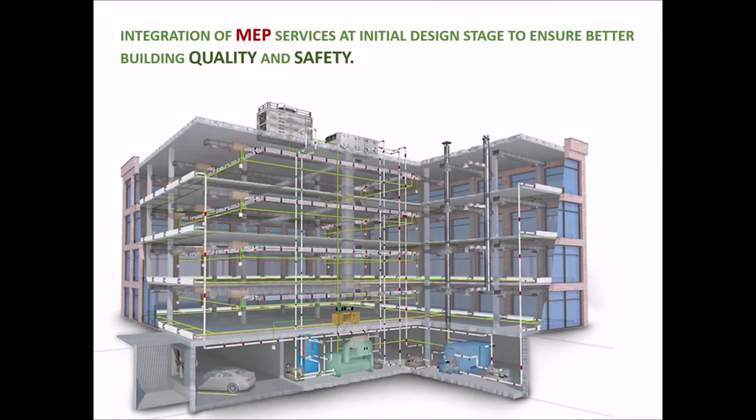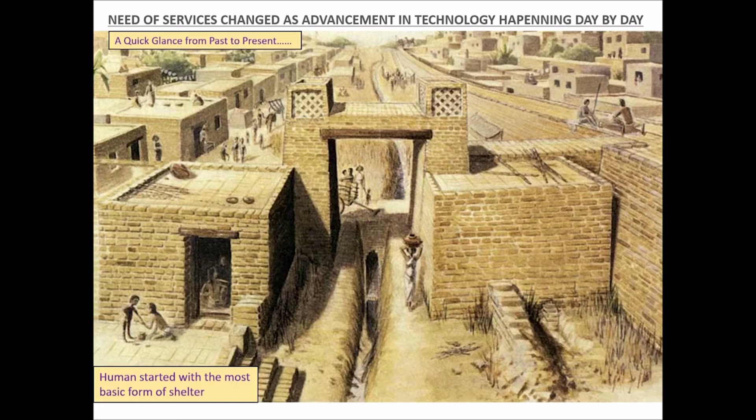Need of services changed as advancement in technology happening day by day. A quick glance from past to present. Humans started with the most basic form of shelter. The shelter evolved with increasing needs and progress in building materials. New materials thrived in the market. With the invention of breakthrough technologies in AEC - architecture, engineering and construction - buildings expanded vertically and skyscrapers came into existence.

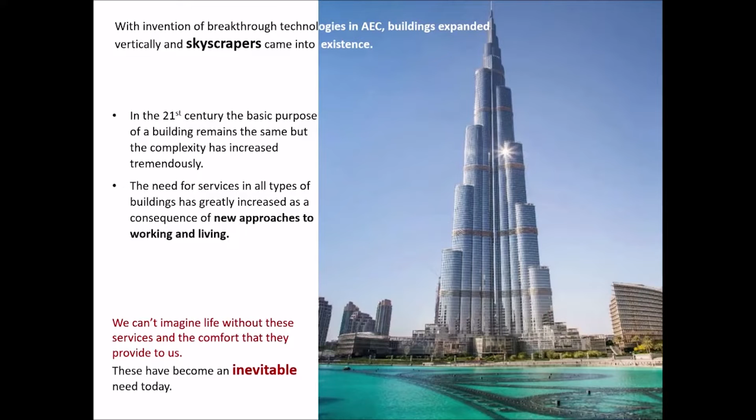In the 21st century, the basic purpose of a building remains the same, but the complexity has increased tremendously. The need for services in all types of buildings has greatly increased as a consequence of new approaches to working and living. We can't imagine life without these services and the comfort they provide us. They have become an inevitable need today. Now we have buildings with complex functions and services like malls, hotels, and hospitals. Our comfort, building operation economics, and building life cycle are now largely dependent on how effective these MEP services are planned in a building. Proper MEP services integration enhances quality and safety of a building, hence a comfortable and safe environment can be achieved. Imagine life without all these.

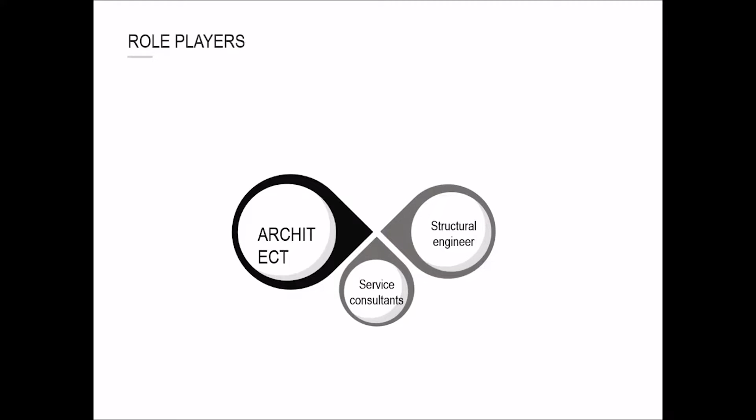Now there is need to talk about the key role players involved in the design decisions about the integration of services with the structure at initial design phases. The complexities of modern construction has given rise to the need for various professionals and specialists to come together and work as a team. They include architects, structural engineer, service consultants, and clients. The designer and architect is responsible for proper coordination among the whole team.

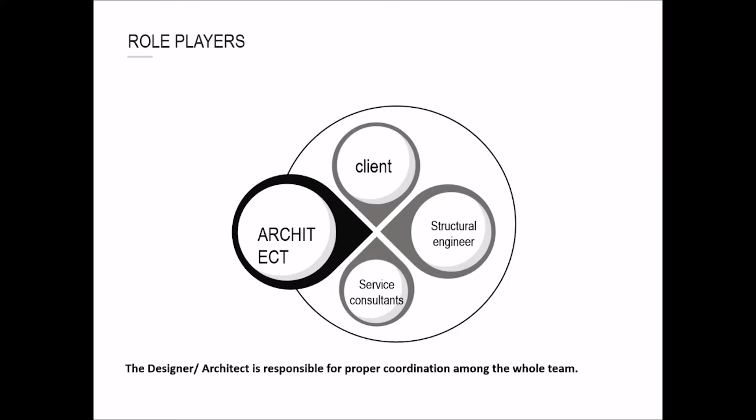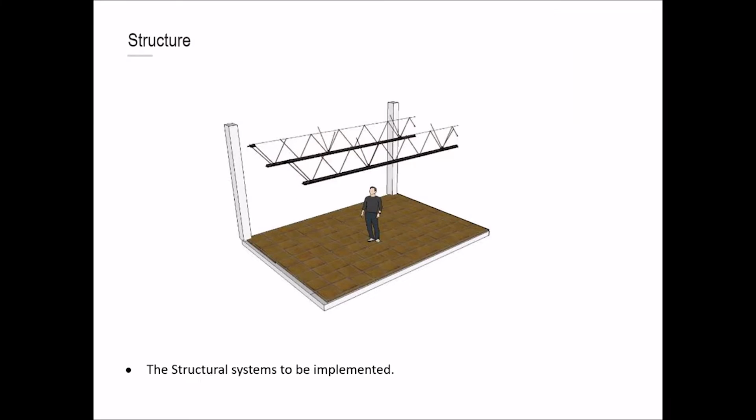What all should an architect consider and keep in mind while designing a building? The function of the spaces, the structural systems to be implemented, the services to be accommodated, and the building envelope. Among all these components, the structure and services integration plays the major role in building's quality and safety. The quality of the final product depends on how well these factors are integrated and brought together.

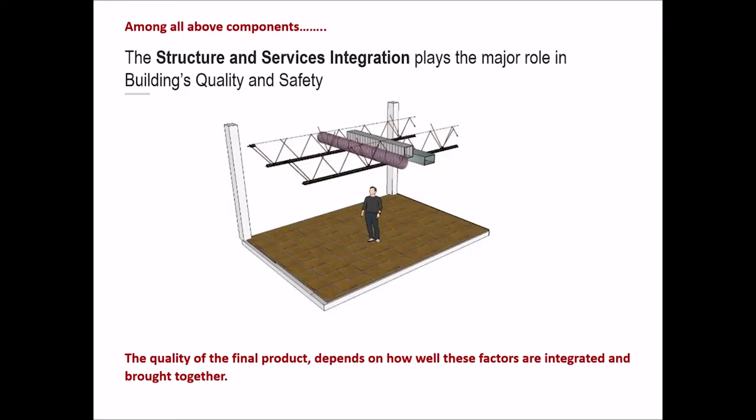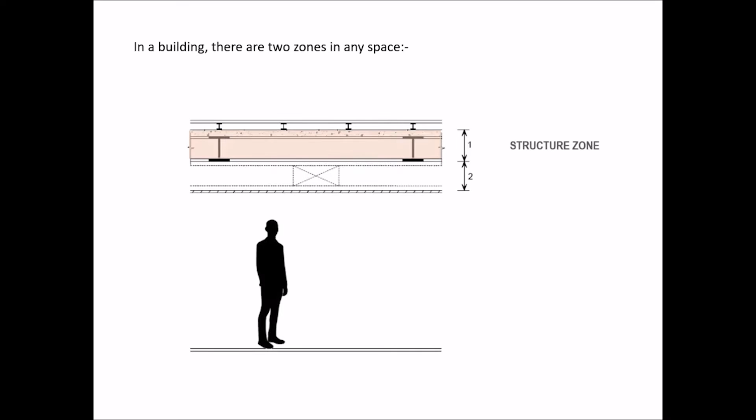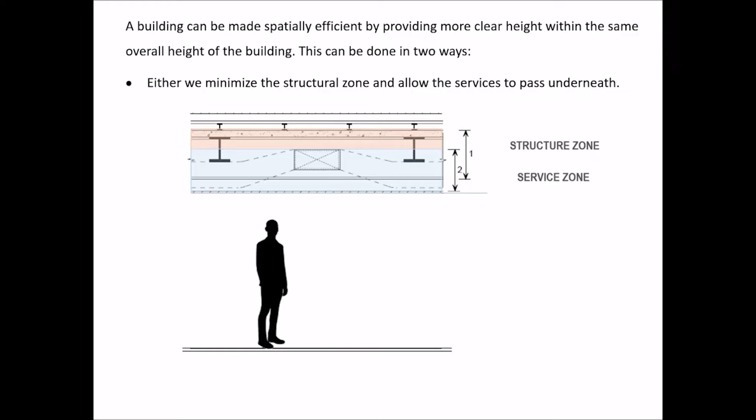After learning the key role players involved, we will learn the concept behind services integration and some ideal examples of services integration with the structure of the building. So the methods of integration are: in a building, there are two zones in any space - first, structure zone, second, service zone. A building can be made spatially efficient by providing more clear height within the same overall height of the building. This can be done in two ways: either we minimize the structural zone and allow the services to pass underneath, or we accommodate the services within the structural zone, thereby combining the two zones.

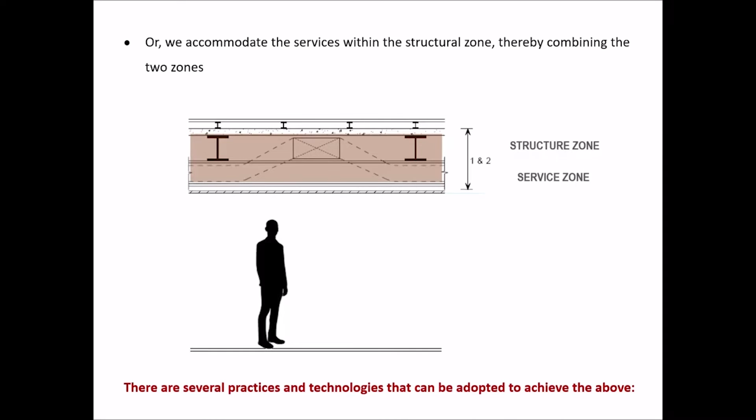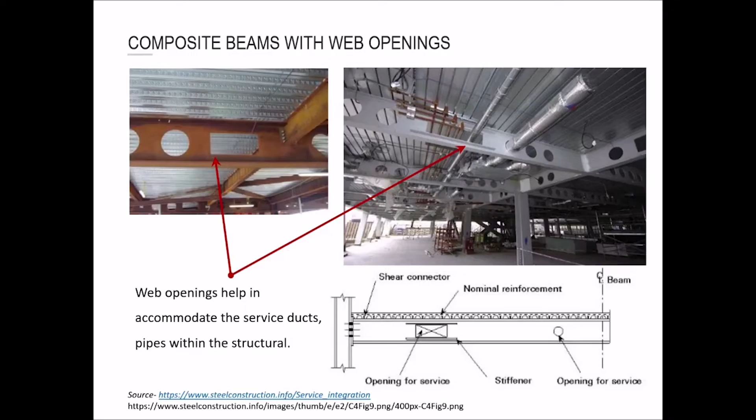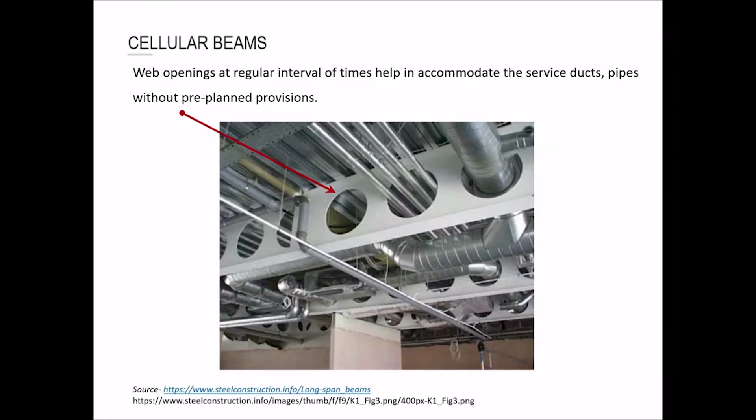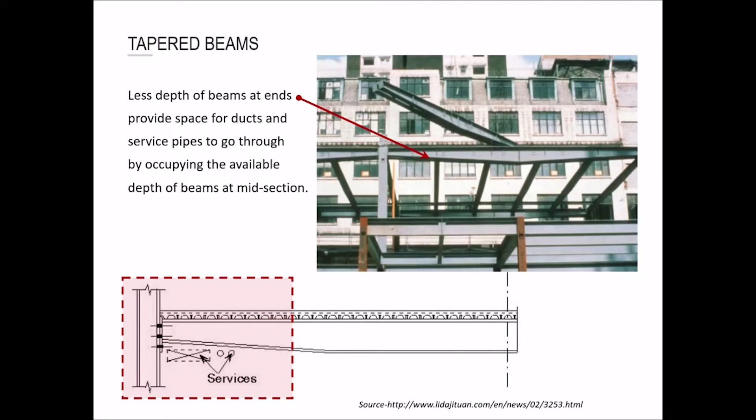There are several practices and technologies that can be adopted to achieve the above. Composite beams with web openings - web openings help accommodate the service ducts and pipes within the structure. Cellular beams - web openings at regular intervals help accommodate the service ducts and pipes without pre-planned provisions. Tapered beams - less depth of beams at ends provide space for ducts and services to go through by occupying the available depth of beams at midsection. Composite trusses have lot of intermediate spaces available for integration of services through them.

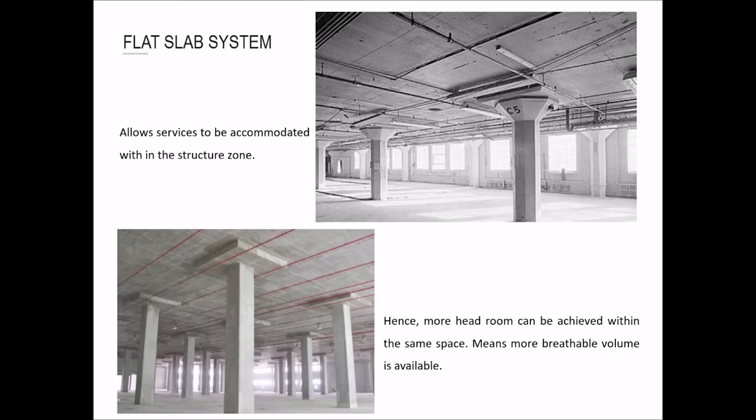Flat slab system allows services to be accommodated within the structure zone. Hence, more headroom can be achieved within the same space, meaning more breathable volume is available. Post-tension slab system: a building frame with post-tensioning will lower cost for the foundation, columns and shear walls, facade, cladding and MEP systems, and also will lower operating expenses because of the reduced building volume.

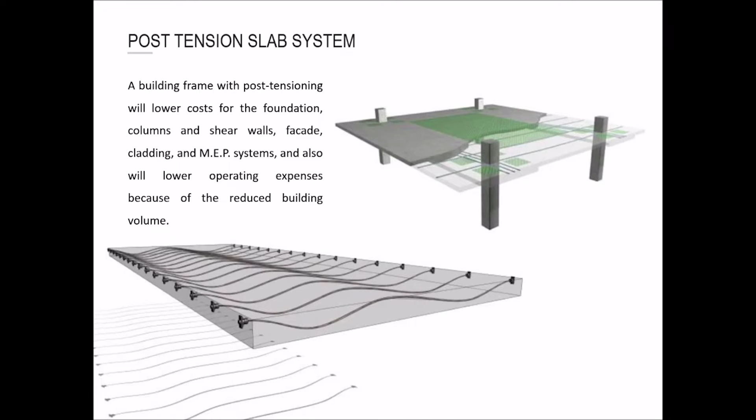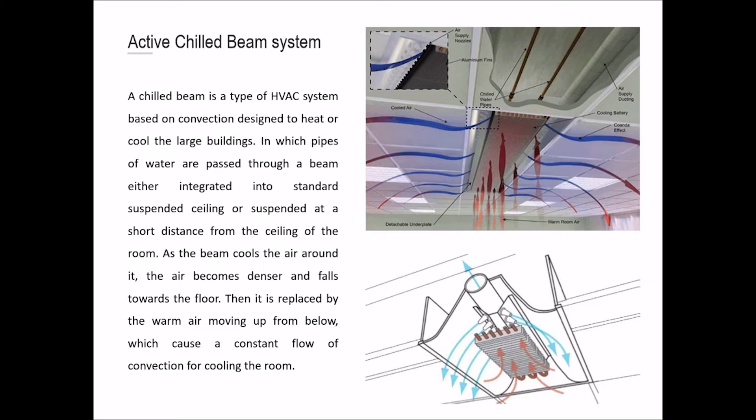Active chilled beam system: a chilled beam is a type of HVAC system based on convection, designed to heat or cool large buildings, in which pipes of water are passed through a beam, either integrated into a standard suspended ceiling or suspended at a short distance from the ceiling of the room. As the beam cools the air around it, the air becomes denser and falls towards the floor, then is replaced by warm air moving up from below, causing a constant flow of convection for cooling the room.

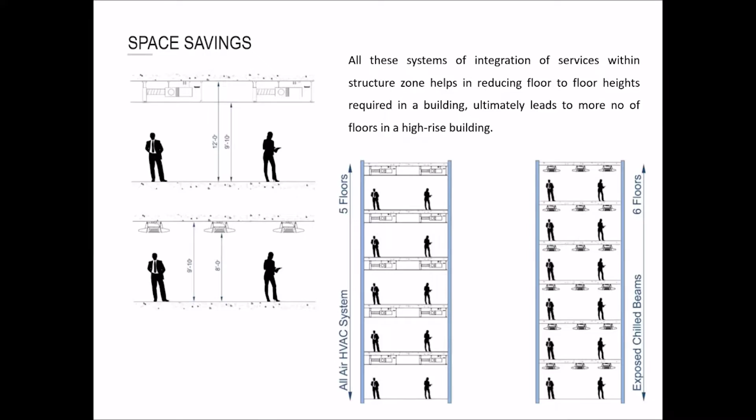All these systems of integrating services within the structure zone help reduce the floor-to-floor heights required in a building, ultimately leading to more floors in a high-rise building. Now we will see a case study of services integration with the building structure, taken as a good example of pre-thoughts given to integration of MEP services at initial design stages to ensure better building quality and safety of people.

Now talking about complex buildings like hospitals and hotels, one very important structural component is service floors. Service floors are a very good method that allows us to address various aspects of structure and services integration in a building. It is a floor provided whenever there is a need for a change in structural grid and service requirements in complex buildings like hospitals and hotels.

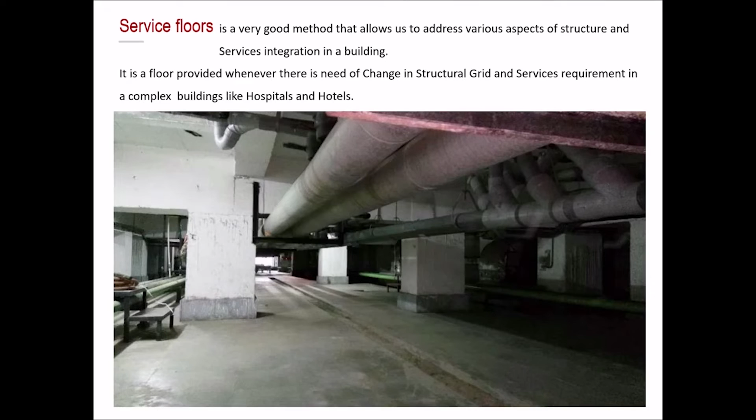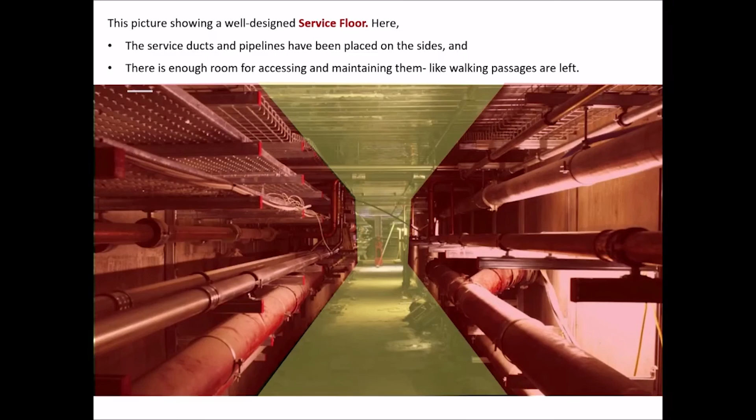This picture shows a well-designed service floor. Here, the service ducts and pipelines have been placed on the sides, and there is enough room for accessing and maintaining them, with walking passages left clear. The National Building Code of India states that if the height of the service floor is kept up to 2.4 meters, then it is free of FAR, floor area ratio. This helps greatly in the incorporation and maintenance of services in a complex building.

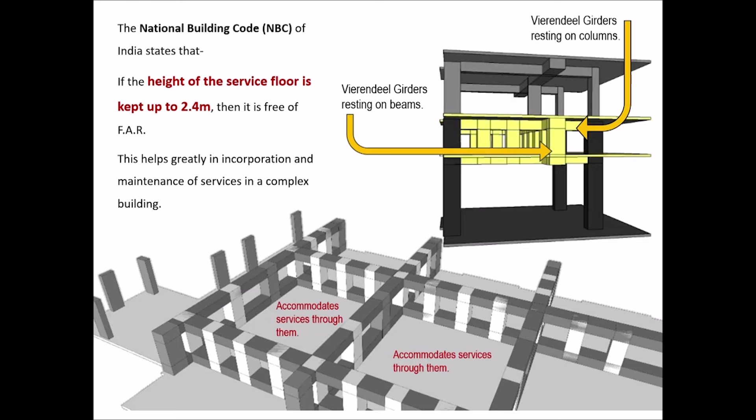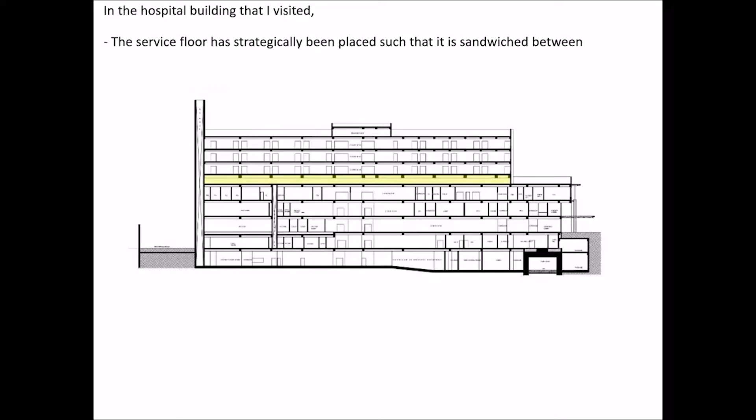In a hospital building that I visited, the service floor has strategically been placed such that it is sandwiched between the patients' rooms floors above and operation theatres below. The service floor also enables us to transfer services horizontally and vertically.

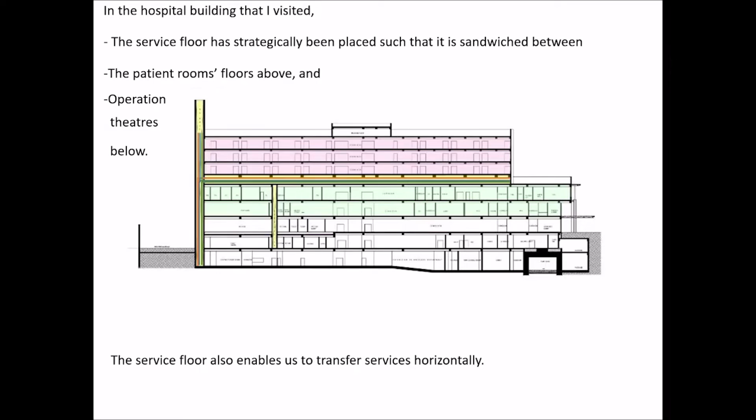Operation theatres require separate AHUs in order to maintain sterile conditions. By this strategic placement of the service floor, AHUs can be conveniently placed just above the operation theatres, thereby eradicating the need for ducts to run through large distances.

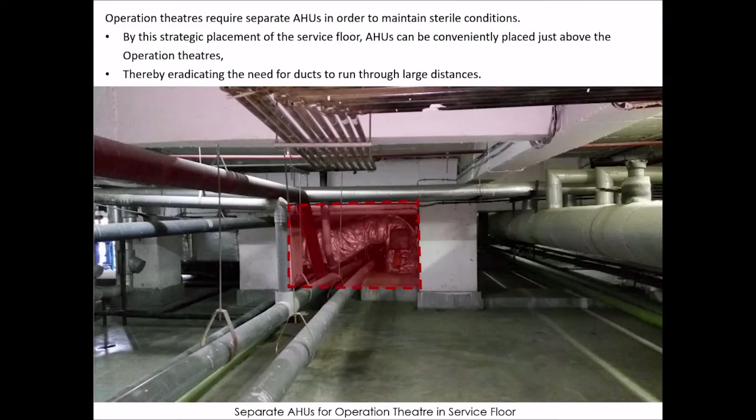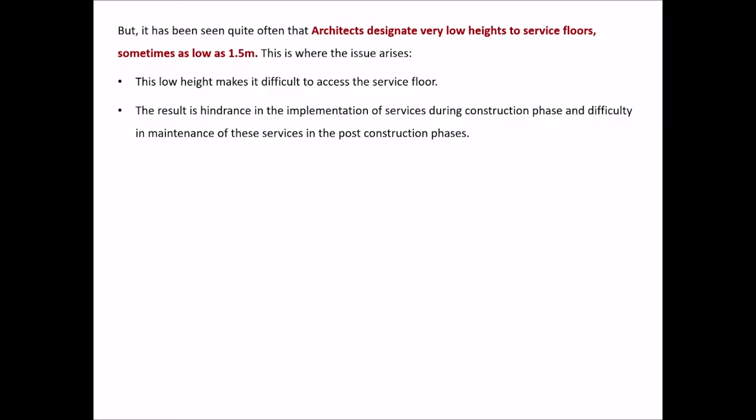But it has been seen quite often that architects designate very low heights to service floors, sometimes as low as 1.5 meters. This is where the issue arises. This low height makes it difficult to access the service floor. The result is hindrance in the implementation of services during the construction phase, and difficulty in maintenance of these services in the post-construction phase. Site engineers literally have to crawl in to get through, hence it becomes difficult to operate and maintain the service floors.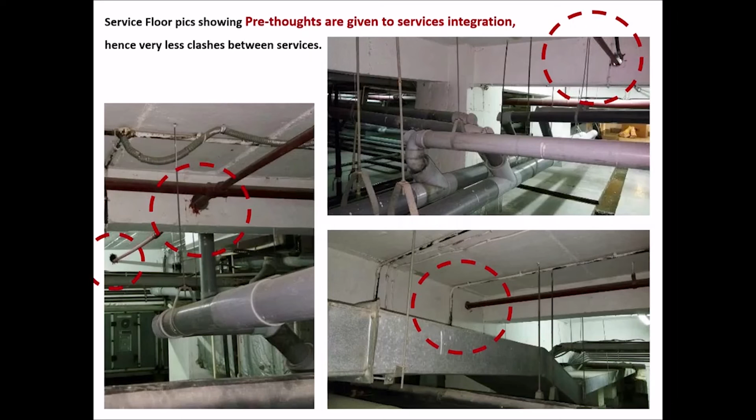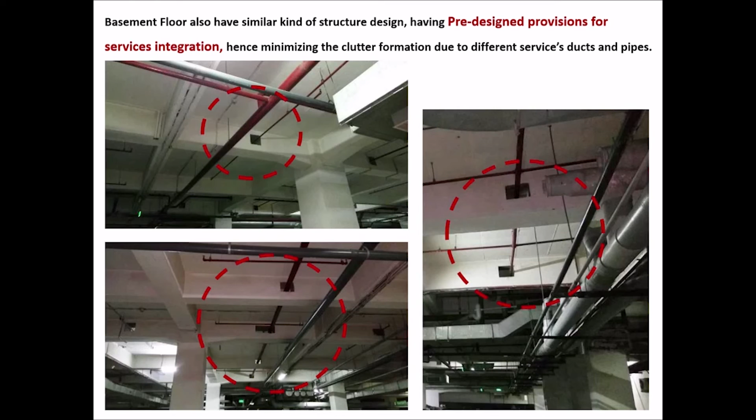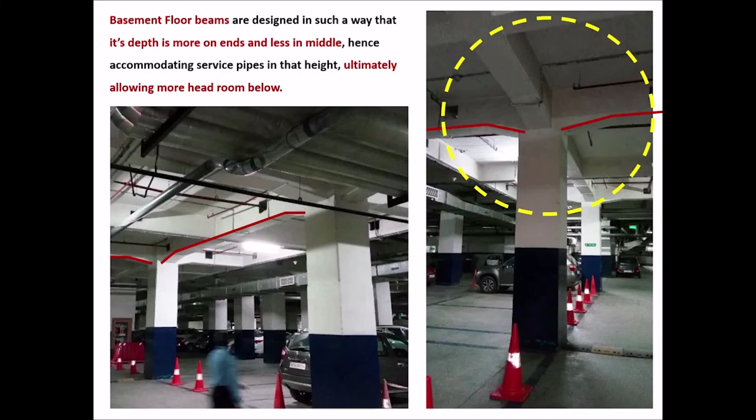Service floor pictures show that pre-thoughts are given to service integration, hence very few clashes between the services. Basement floors also have a similar kind of structural design, with pre-designed provisions for services integration, minimizing clutter from different service ducts and pipes. Basement floor beams are designed such that their depth is more at the ends and less in the middle, accommodating service pipes in that height and ultimately allowing more headroom below.

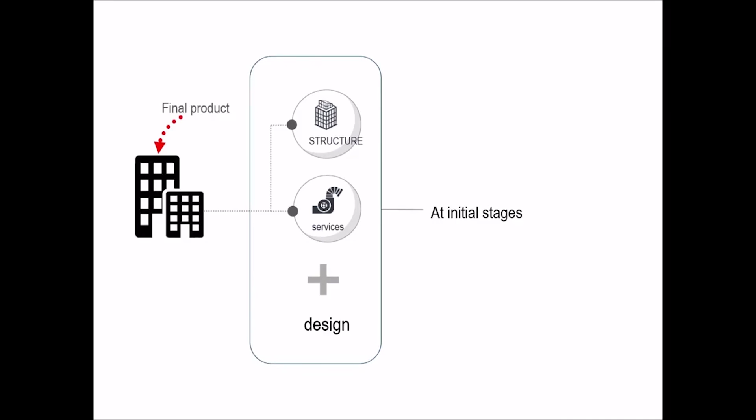So the conclusion is: when structure and services are combined at the design stage in the initial stages, the final product will have enhanced building quality and safety of people. So the final product is efficient, comfortable, cost effective, easy to maintain and flexible. Ultimately, it gives happy end users.

So this presentation is about the need for proper integration of building services with the structure of the building, to have a neat and effective execution of services. As the right execution of services affects the building life cycle from construction stages to post-construction phase—that is, operation and maintenance phase of the building also. This means if any service has difficulty in its execution phase at construction time due to issues from design decisions, then it will surely be a problem in future operation and maintenance of the building also.

That is, in the post-construction phase also, it gives a degraded building quality and safety of people in a building. So it is recommended that pre-thoughts should be given to the integration of MEP services with the building structure at initial design stages to ensure better building quality and safety of people. Thank you.